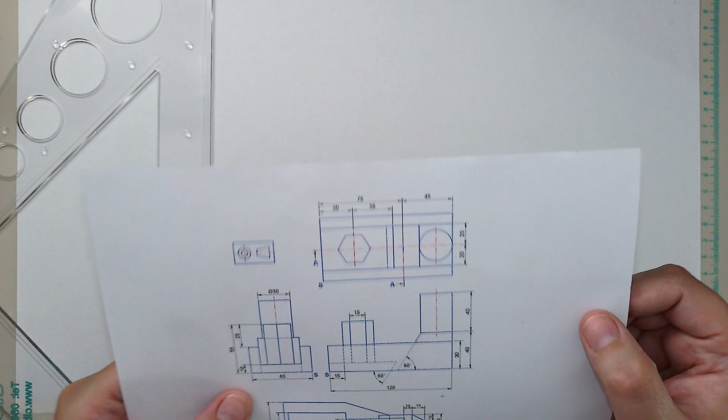So we can draw our construction block where our drawing is going to fit in, and then we are going to cut out the piece A and A. So this piece of the drawing is going to get cut out. I'm going to start by extending my lines and then drawing my construction block. I have my construction lines, and this is going to be my front view, this is going to be my left view, and then my top view is going to be on top.

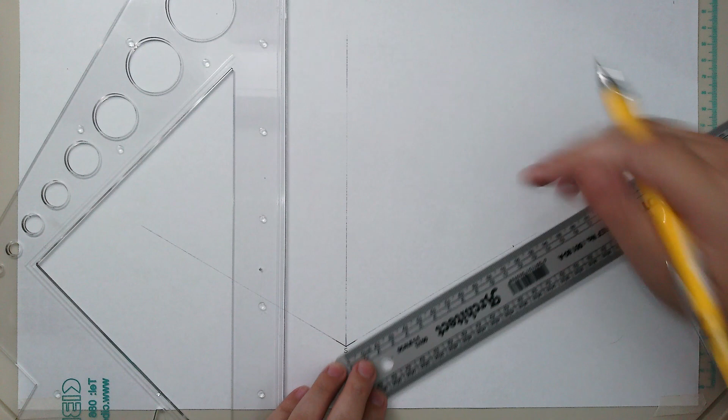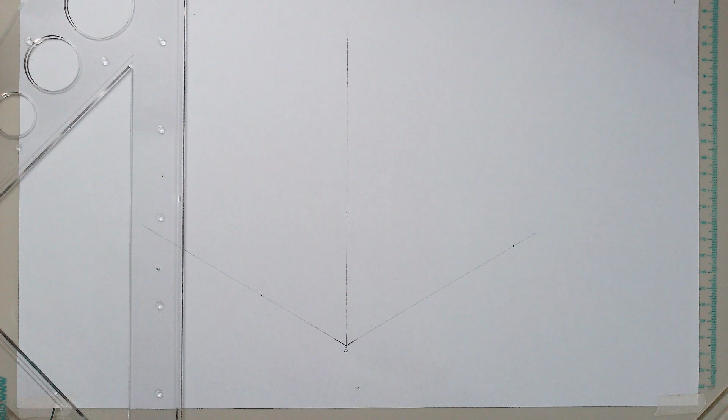The front view is 120, so I measure 120 on this side, and the other side is 60, and the total height is going to be 80. Just wanted to make sure I measured that correctly. 80. Now I can draw in my construction block.

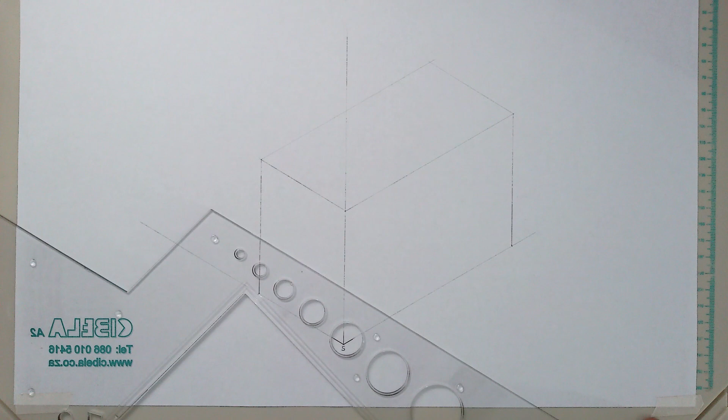This is my construction block where my entire drawing is going to fit in. Then I'm going to have a look at what presses against the sides. For my front view, we have this piece that fits here against the side, but this piece, I'm going to color this in, this piece has been cut out. So we are only going to see this part, the rest is cut off. I'm going to measure the height, that's 30.

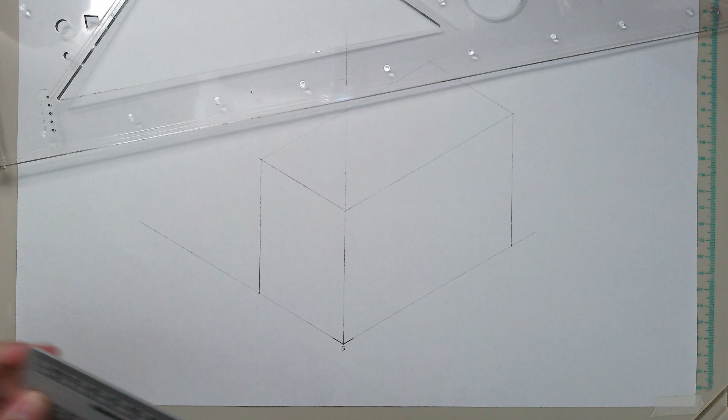And then I'm going to take the distance that's left, 45 to the cutting plane is 45. So I measure 45. And I'm definitely going to see that part, so that's dark.

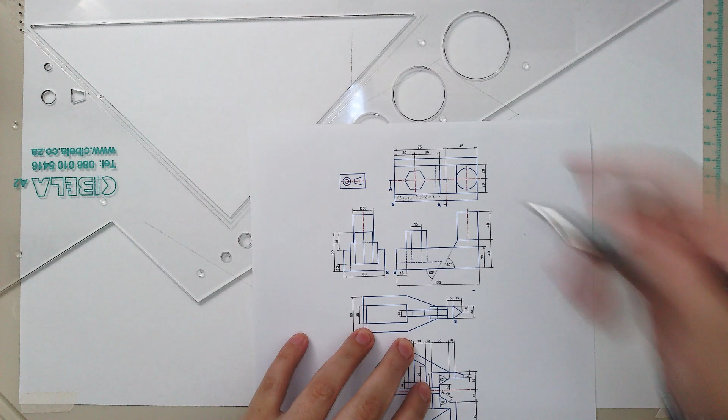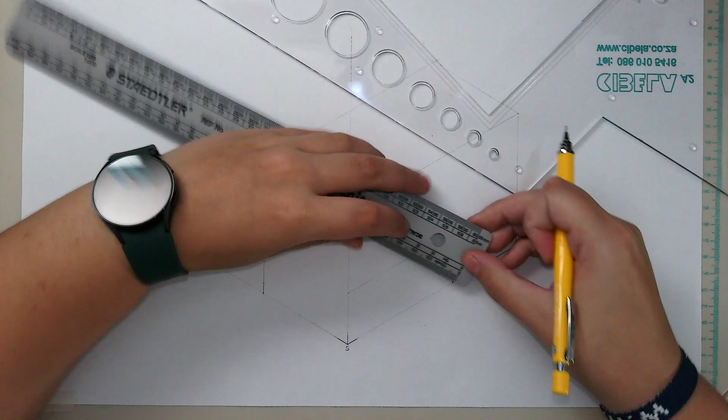Then how far does this part go in? It has a total of 60, subtract 40, which is 20 left, so it's going to be 10 each side. I'm going to take construction lines inwards, get my construction lines, and now I can measure 10. And I can complete this part as well. That's one piece of our drawing that's done.

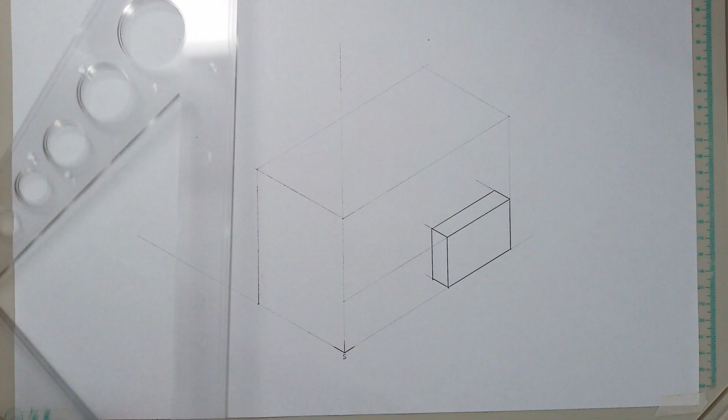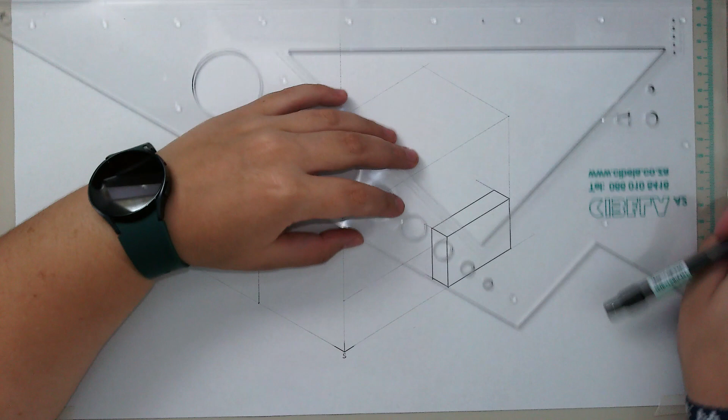What I like to do then is I'm going to draw this block that's cut out basically, but I'm going to do it in another color so we can see where it's going to be taken out. I'm going to do it in orange. How far does it go in to the center? So 10 plus 20 is 30.

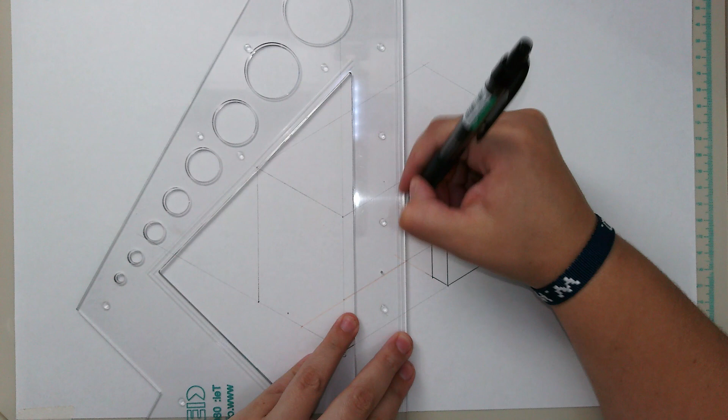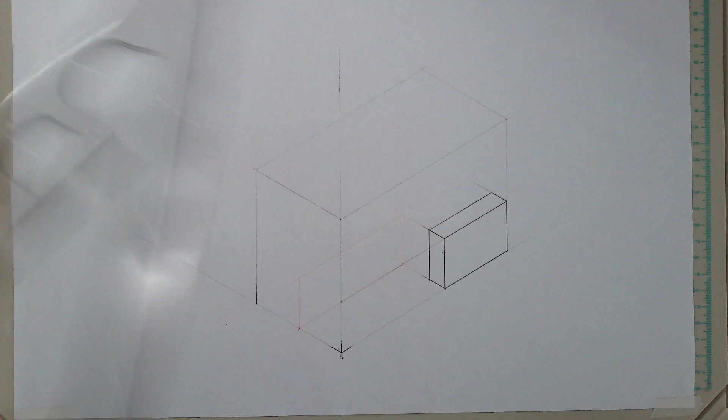So now we know that in this part there is not going to be anything. This is cut out, which means that in our drawing we are going to see from here to there, this part has been cut out. So we are going to see the rest of here and a total of 30 upwards. I'm not going to measure again because I already measured it. I'm just going to take it over to this side

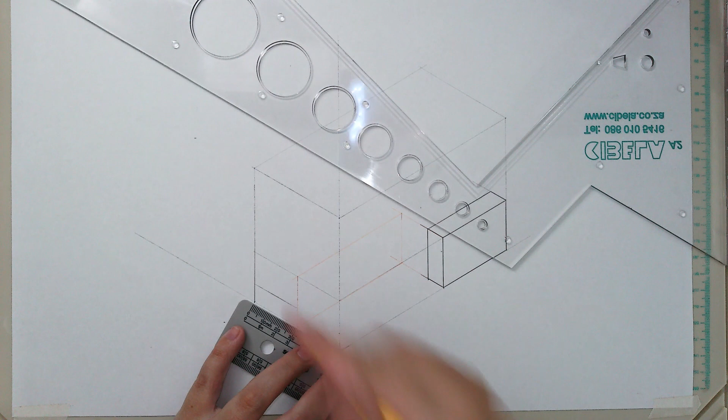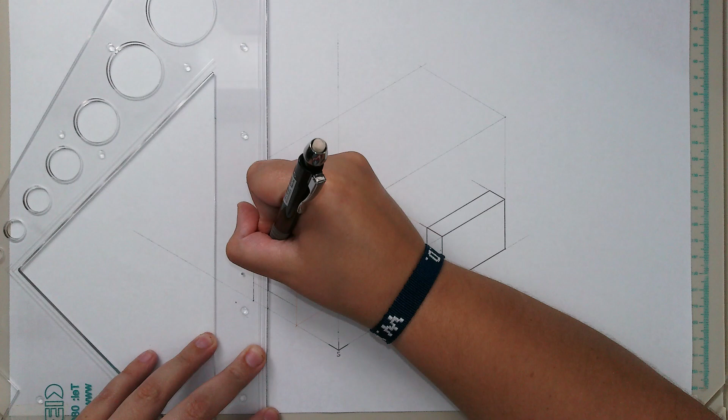like that. I am going to measure 10 upwards. And 10 in, I think, yes, it's 10 in, which is the same thickness as this side. And that part is what's pressed against the left view. This part is pressed up against this view.

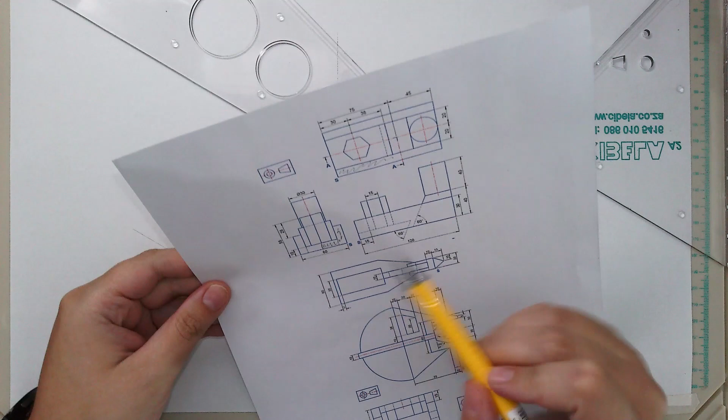Now we can see that this part goes in for 66 millimeters. So I'm going to draw my construction line, then measure 66. And I know I can draw that part dark because the hexagon is on top of that and we are cutting through that. This part we can't draw dark yet because we don't know what that distance is exactly. So for the top part, I can draw that in dark.

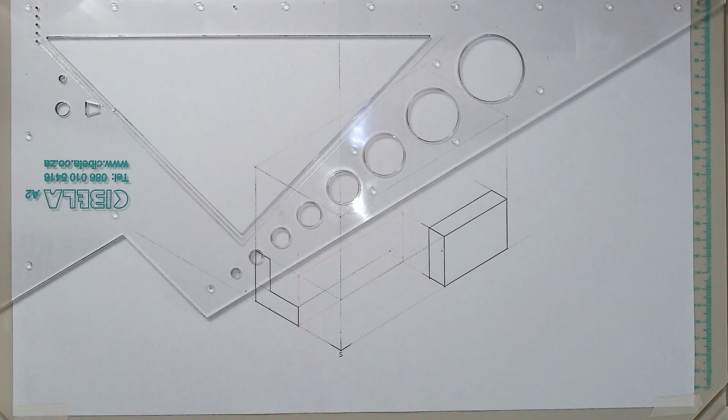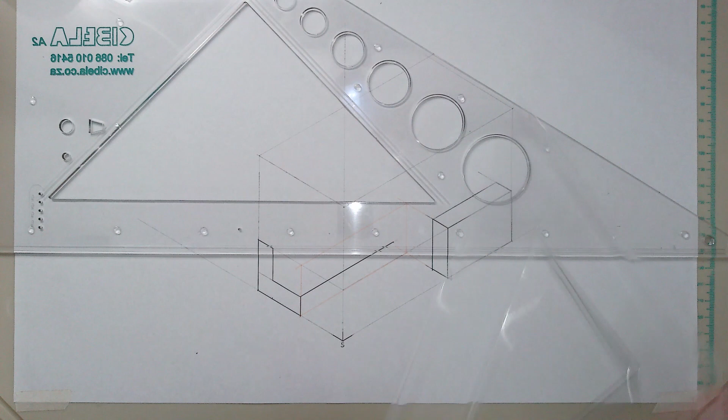And then I need to get an auxiliary view to find this angle. To get my auxiliary view, I'm just going to draw a line like that, get my 60-degree line. We know the height of this is 10. Okay, the height is 10. So I'm going to measure 10.

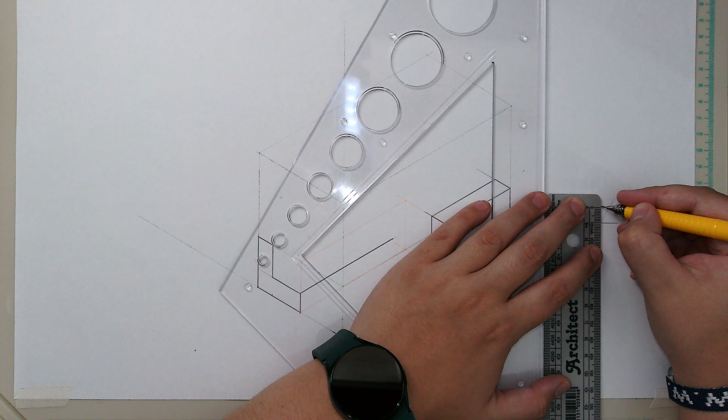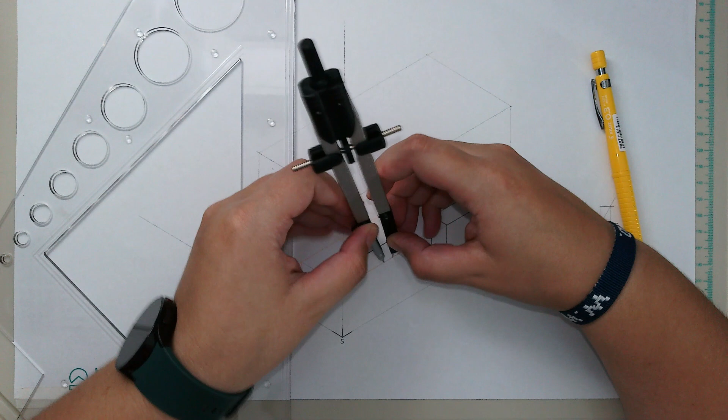So there I have my 60-degree angle, and I can measure this part. Project this one down and measure that part. And there we have that angle. Next,

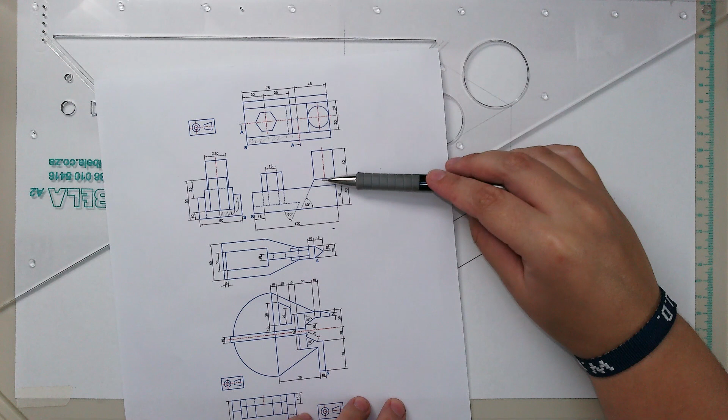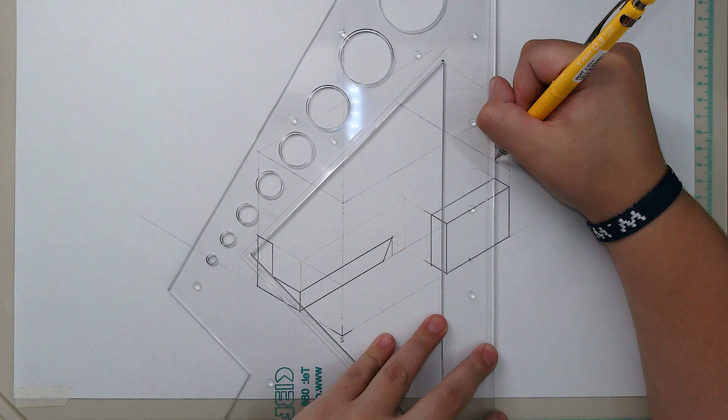we see that there is this platform where the circle is on top of, which is 40 millimeters high. So I'm going to measure 40 millimeters. And then extend that. Extend this upwards because this is where that touches. It's going to come out this way.

For the diameter of the circle, which is 30. So we are going to measure 30.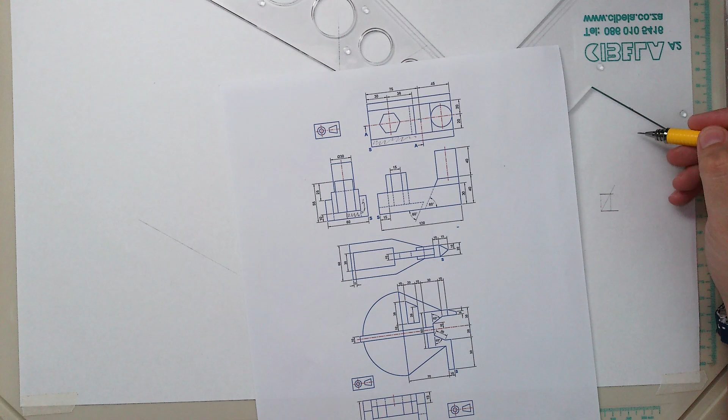To get this angle, we need to extend this one and measure from the bottom up 40. So I'm going to extend this. I'm going to extend this. Is that correct? Let me just make sure. Like that, and measure 40 millimeters up.

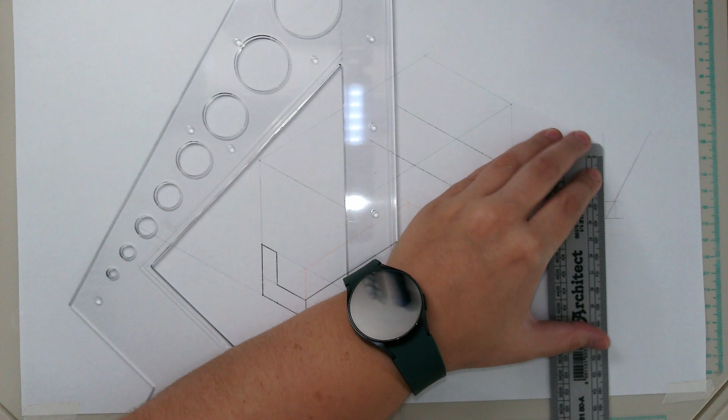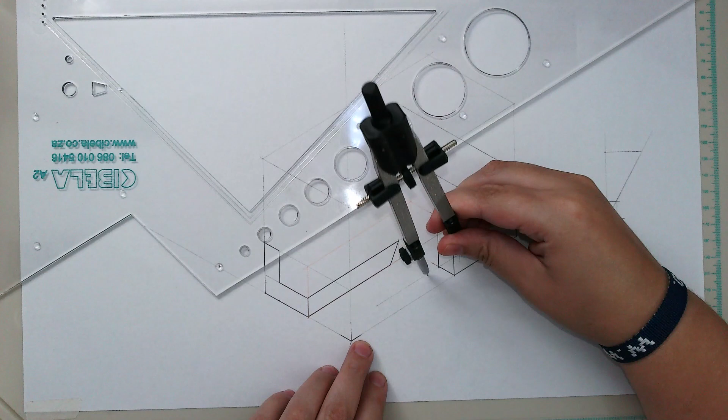This one I'm going to take down, and then on this line measure from here that distance. This is where our line would be, but it has been cut off on this end. So I'm going to complete the construction of this angle.

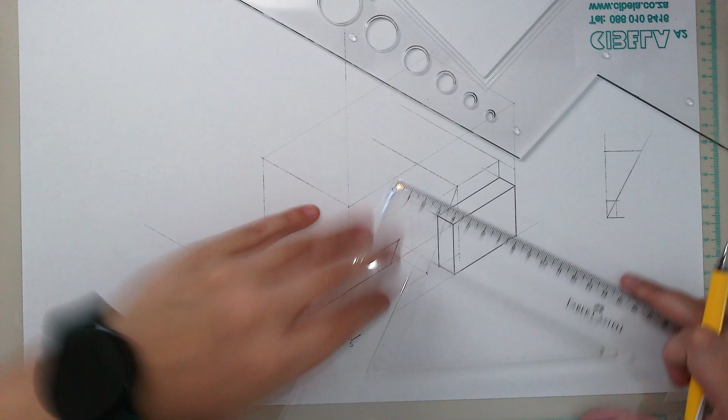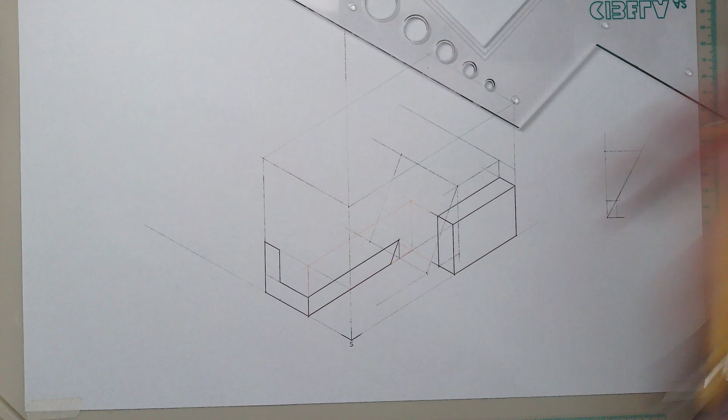It's going 40 inwards, so I'm going to measure 40. And I'm going to keep that as construction because I want to see where it is that has been cut off. So for example, it has been cut off over here. Let's just measure this.

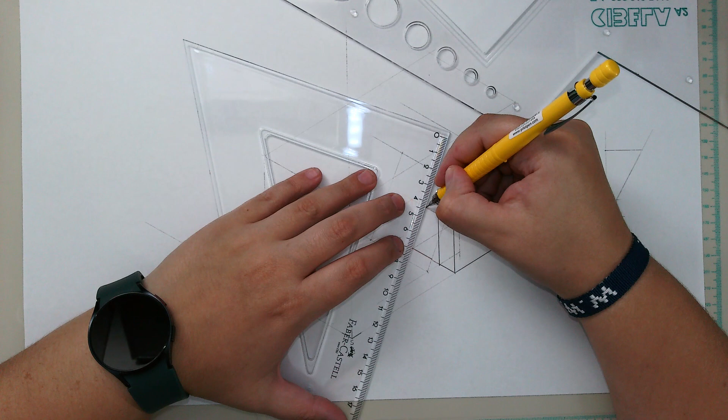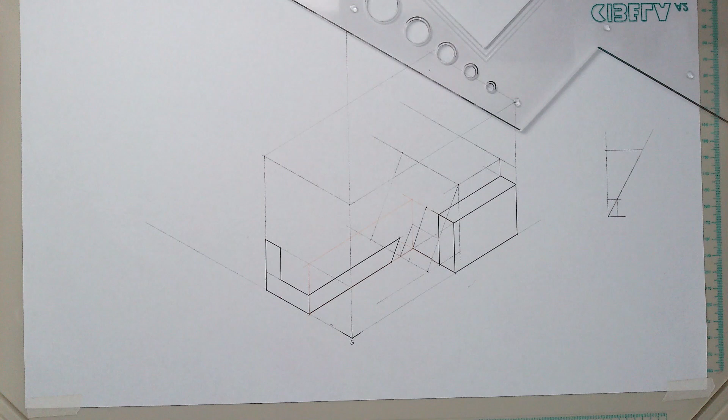But we will find that the exact placement should be like this. So this will be dark, but I'm not going to draw that in. I just want to complete the circle and the hexagon to see exactly what parts we are going to see. Let me just draw in this line as well. So it will make it easier to draw in the dark lines after we know what we are going to see.

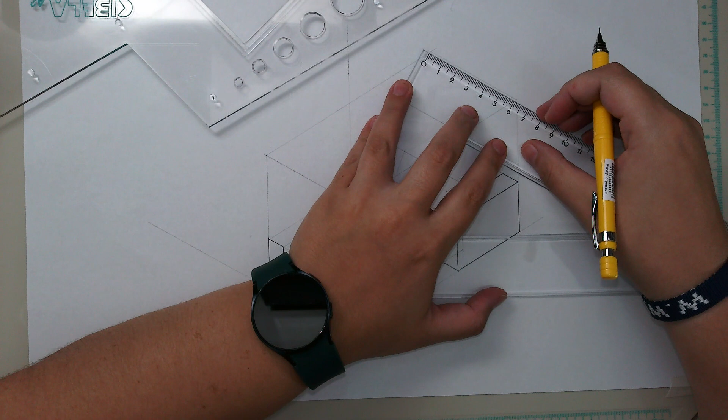Okay. Now, if I look at the question, on this top part, the circle is pressed against the top part. So I will need to find the middle of that, which is going to be 30. Going to draw my center line, which is long dash, short dash, long dash, short dash, long dash. Okay, and I'm going to measure 15 each way because the diameter of the circle is 30. I'm going to measure 15.

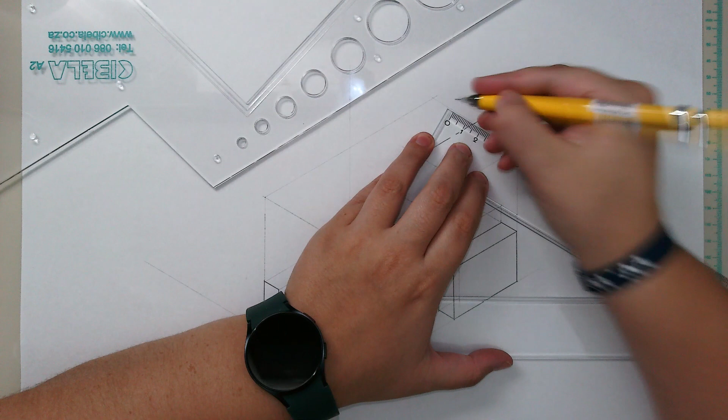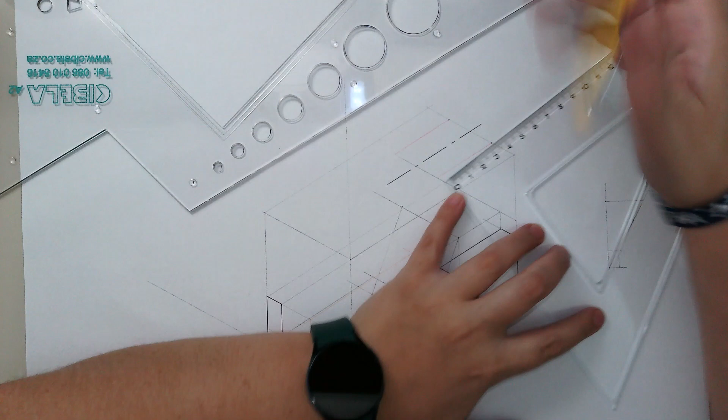This I'm going to do in red for my circle construction, so we can just see the circle construction. I'm going to measure 15 on this. Actually, I'm going to measure 30 and 15. That's 15. That's 30. I think I went too far with this center line, so I'm just going to erase a bit of this. Here we go.

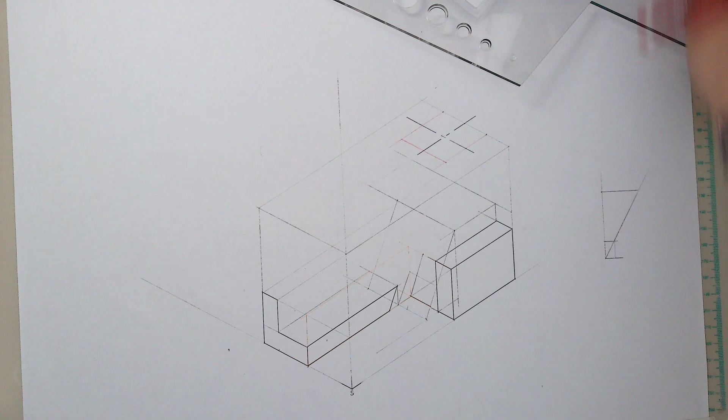Going to join my other center line, long dash, short dash, long dash, like that, and the end of my construction for my circle. Now I'm going to do the construction for my circle from this point to this point. Connect these 2 points, and then from here to the opposite center line, and again to the opposite center line, and this is going to be my center points. The circle is not being cut away, so we are going to see the full circle.

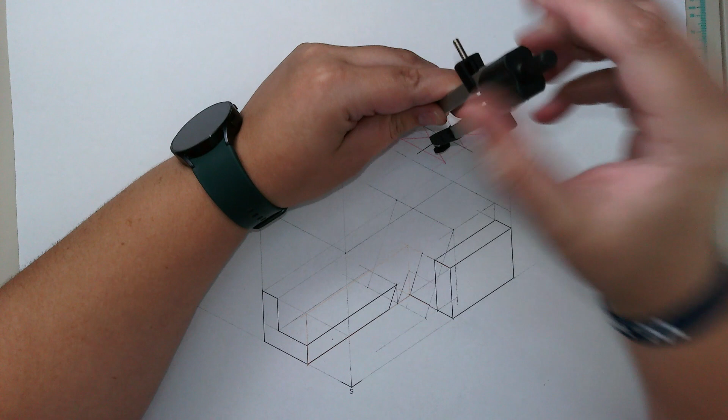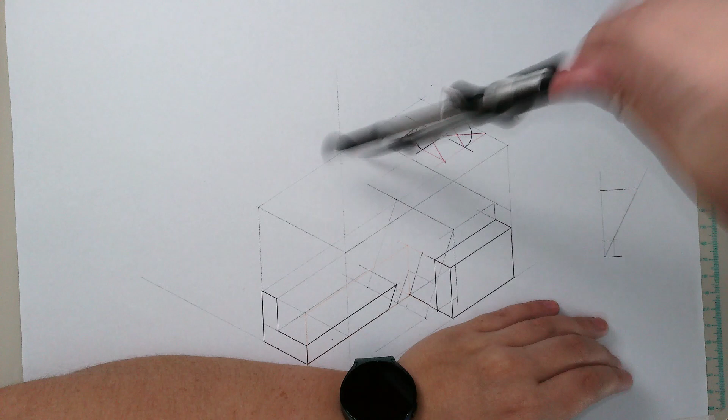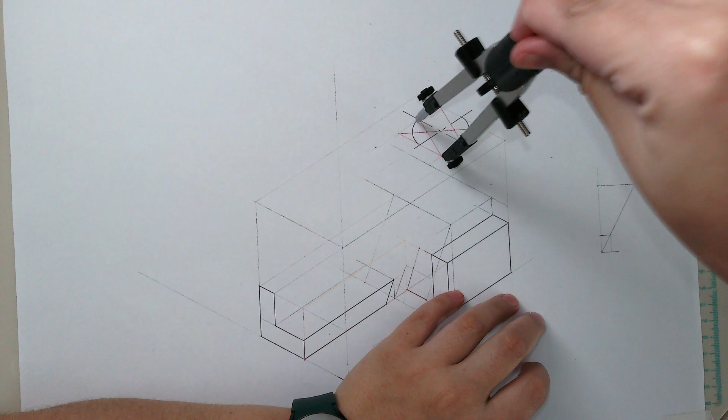Take my compass, put it on my first center point, adjust, and then draw in my circle. Same on the other side. The bigger circles, put it over here, measure to that one. Want to make sure it's firm. See, that's why we want to make sure it's firm. Just erase this part. Let's try that again. On the other side. Here we go, that's the top of our circle.

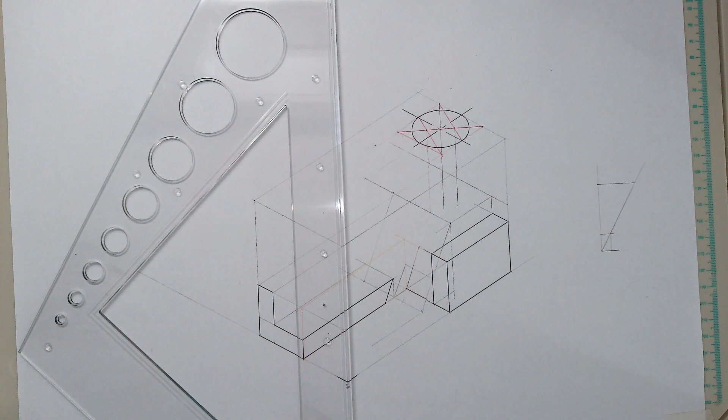I'm not going to draw the entire construction again. I'm just going to take the points that I'm going to see down. For example, I used this point to get that side. I'm going to see it here at the bottom as well. Take it down. Same for this one. I'm not going to see the back, so I'm not going to take this one down, but I am going to take that one down. How far does the circle go down? 40 millimeters, so I'm going to measure 40 on each of them. 40 from the original point.

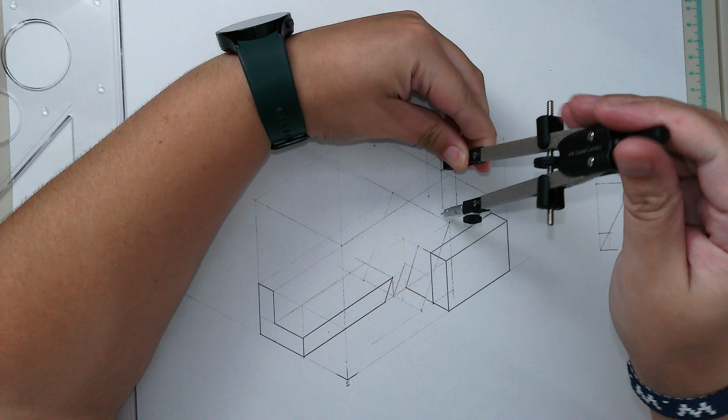Just want to mark them clearly. Here we go. And this one, I'm using the original measurements. Put it on the new center point. I'm only going to do light for now.

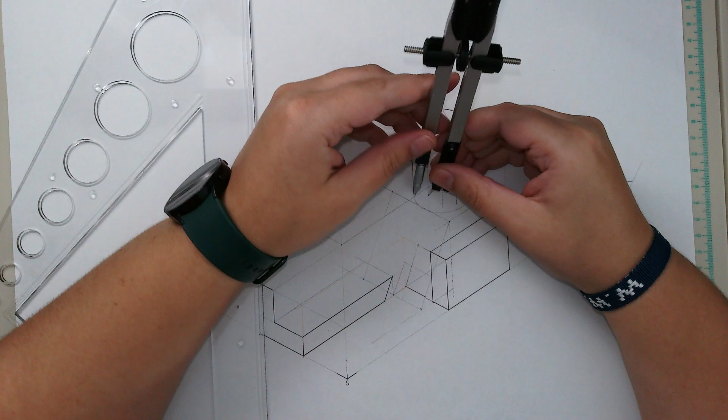And then I can take the edge of the circle down till it touches my construction circle, and now I can draw in the dark parts of the circle that we are going to see. And that's our circle. Now I can finish this platform we have over here, like that.

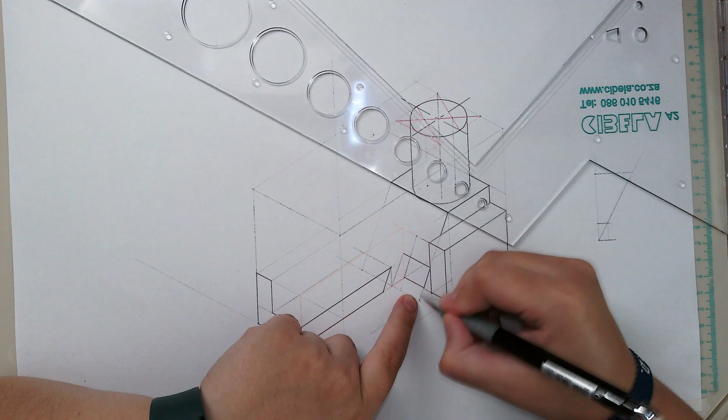As I can see, the hexagon is going to be here. I don't think it's going to interrupt this platform. So I'm going to draw, okay, it's not going to interrupt this part, I know for sure. So where we cut off, this part meets this side line over here that meets this point, this one, it's going straight to there, and then to where it meets the cutting plane again, like this.

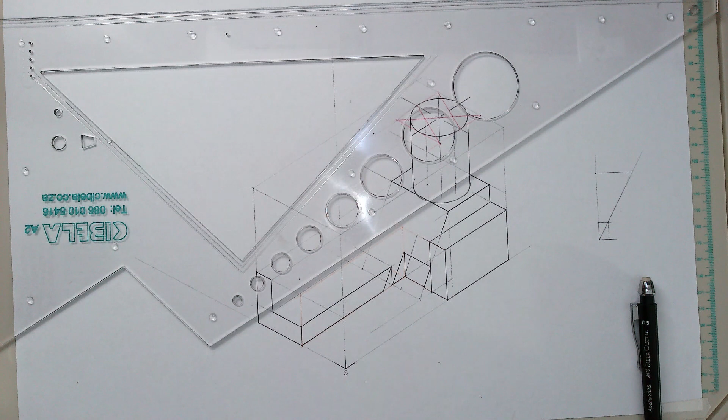And I know this part looks like this, has been cut away. Actually I think this part is going to form part of this, so I'm just going to erase this bit because it's a solid structure. It's not a mechanical drawing that's been put together, so we are going to see this entire thing like that. Okay, so this has been cut off. Now I'm going to draw my hexagon before I draw in this back part.

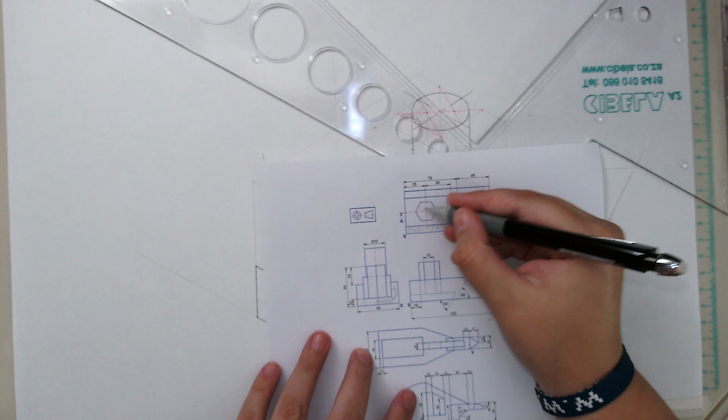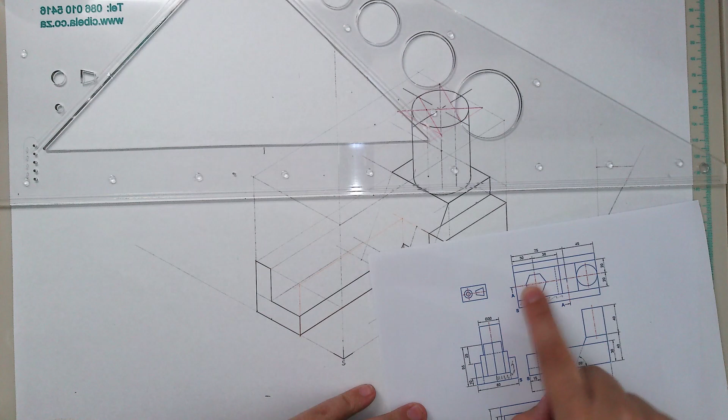First, I need to make an auxiliary view for my hexagon. I'm going to do this beneath. Draw my center lines, long dash, short dash, long dash. And this one as well, long dash, short dash, long dash. My hexagon has a side of 15, so I set my compass to 15. Draw in my circle. Where it ends, it meets this center line, so I put my compass on the horizontal center line. There we go. Make a mark, other side as well.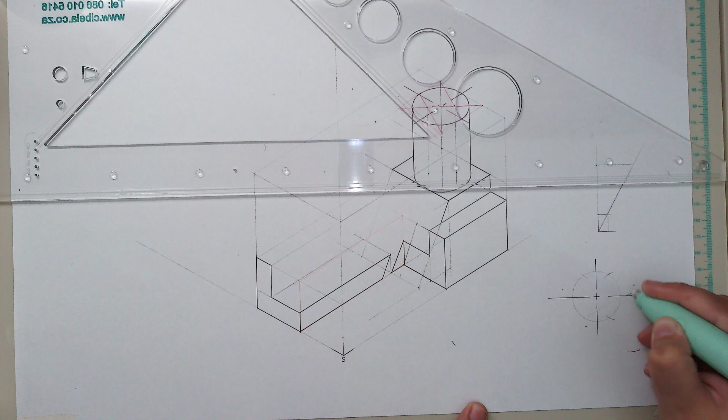Come on. Still a very new board and new equipment, so it hasn't been worked in yet. Very slippery. There we go.

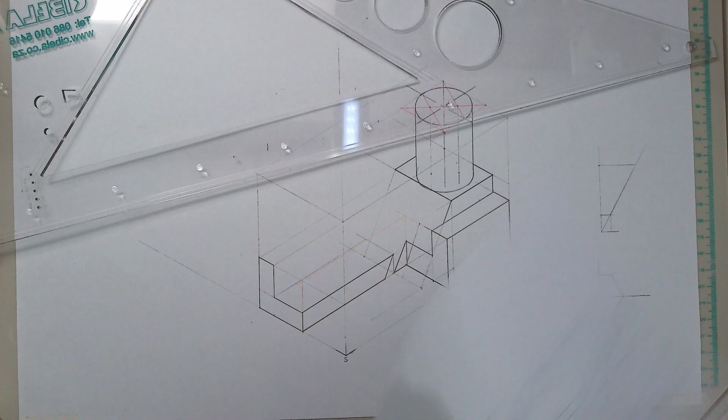And then I connect them, like this. Now I have my hexagon. I can draw my hexagon over here. First I need to find the center. Where is the center? It is 30 millimeters from the left side, and it's cut straight in the middle, so I can just measure 30 millimeters from here. Draw in my center lines.

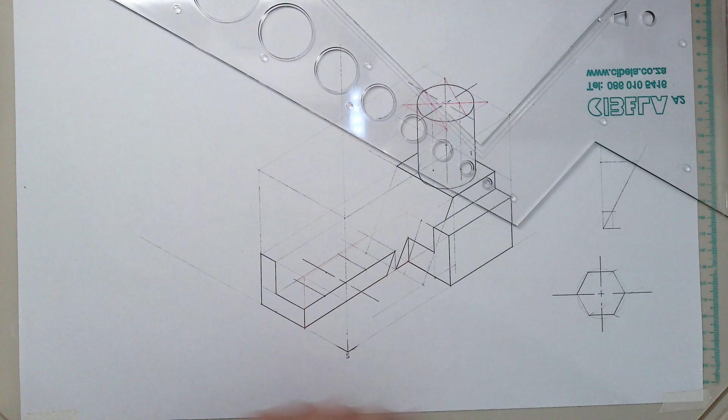And now I'm going to measure from the center to the end. Put it there in the center, end. Extend my construction line upwards, outwards, and then I can find this distance. Put my compass here in the center, measure to the end of the hexagon. First I need to measure upwards, so put my compass in the center, measure to where my hexagon ends, draw in, there we go. Draw in that construction line.

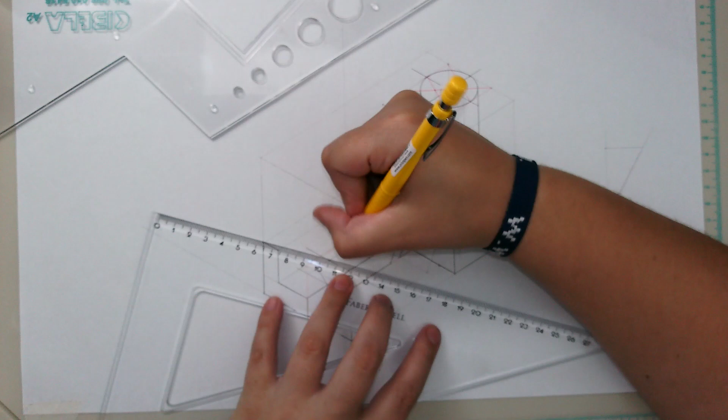Now I can measure this end. Here we go. That's going to be there. I'm only going to do this construction because this is the bottom side. We are going to see the top dark, but this is only for construction. How tall is our hexagon? It is 55 minus 10, so it's 45.

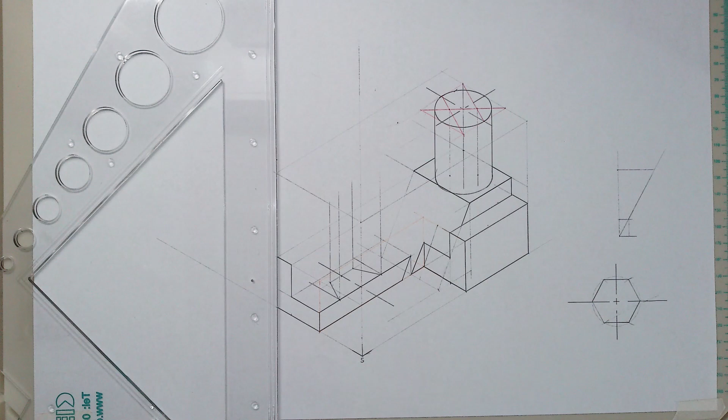I'm going to extend these lines upwards. You could have done this by measuring from the center point 45 upwards and doing this construction there at the top. It was just easier for me to do this here at the bottom. Now I can just measure 45 upwards on the lines. And I can connect them. Dark.

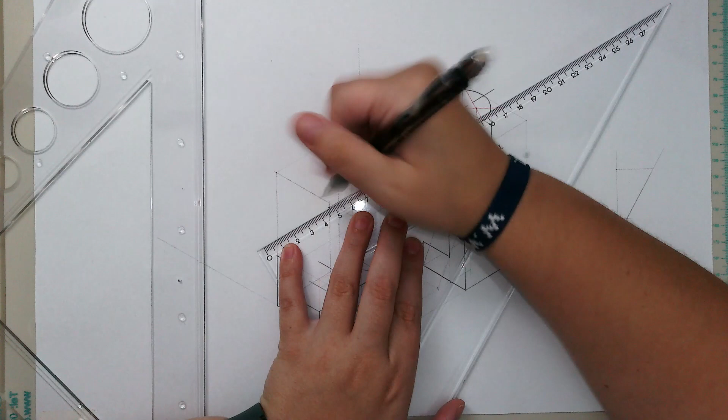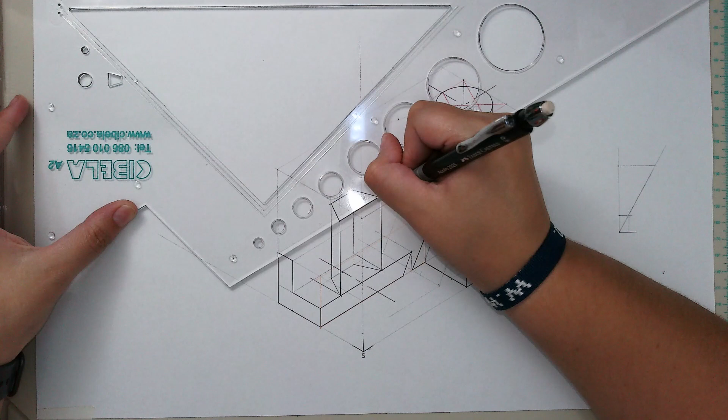I'm going to see that line, that line, that line, like this. Oh, somewhere that didn't line up. I think I made a measuring mistake over there. Happens to the best of us. This is going to form part of this, so I'm going to draw this as a center line. There we go. And this back part I'm going to see as well.

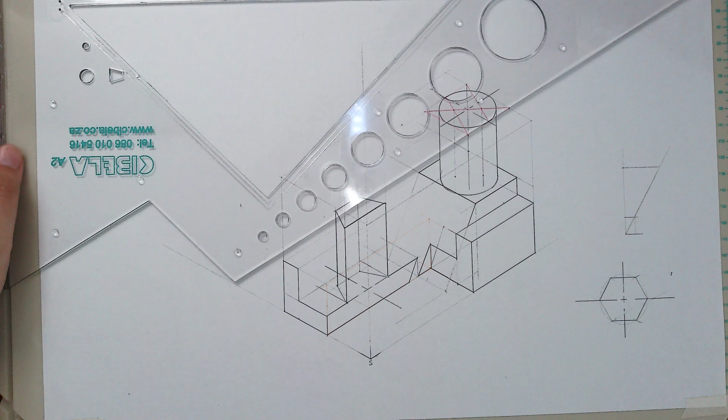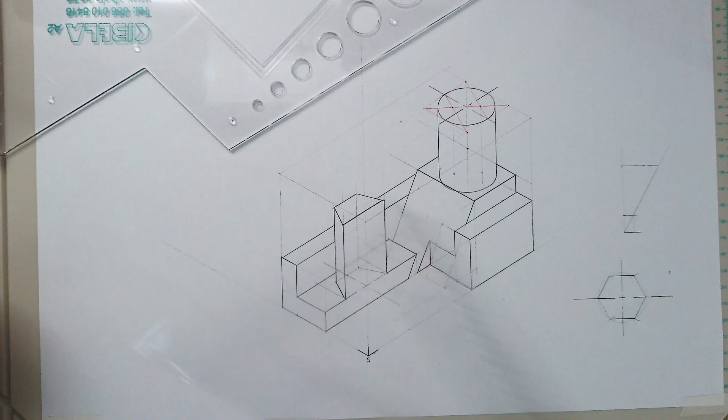Now I just need to finish the last bit of details. I'm going to see this until there. Extend this. And then this comes in front. This passes the front. Here's that line. And lastly, we need to do our hatching with a 45-degree angle.

And there, that's the end of this drawing. Let me zoom in a bit so you can see the final picture very clear.